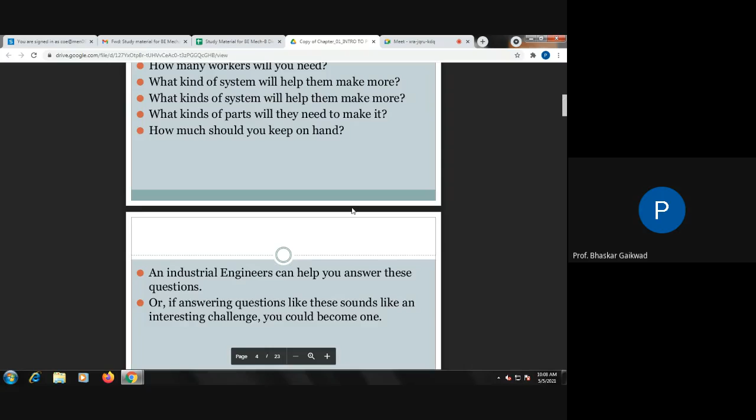Congratulations, here's a new idea that has been given preference to develop this product in industrial engineering. Second, how are you going to make that product? How many workers do you need? What is the requirement to start that industry? What kind of production systems will be there, and what kind of systems will help make it more efficient and effective? What kinds of parts will they need, and how should you keep them on hand? This is the second step. Industrial engineering can help answer these questions. If answering questions like this sounds like an interesting challenge, you should become one of this.

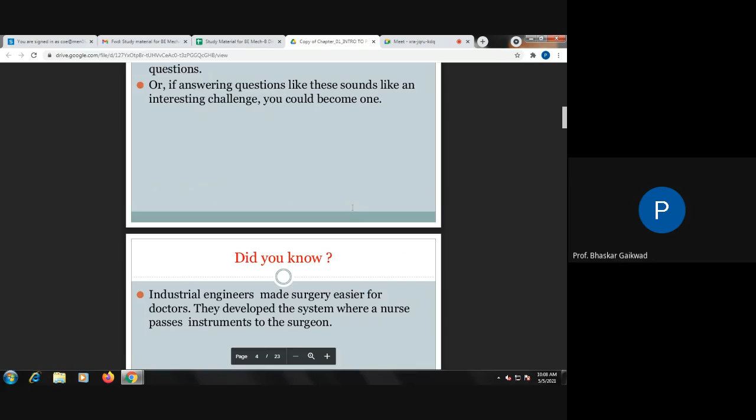Do you know industrial engineering made surgery easier for doctors? They developed a system where nurses pass instruments to surgeons. So this is the field of medical. We can also make use of the concept of industrial engineering here.

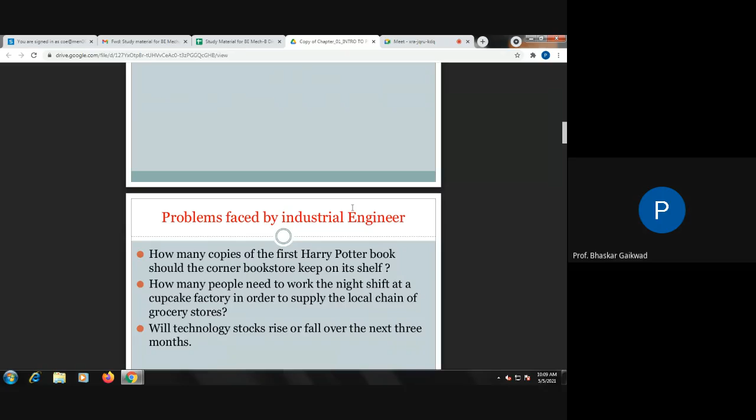Problems faced by industrial engineering: how many copies of the first Harry Potter book should a corner bookstore keep on its shelf? How many people need to work the night shift at a cupcake factory in order to supply the local chain of groceries? Will the technology stock rise or fall over the next 3 months? These are the problems faced by industrial engineering.

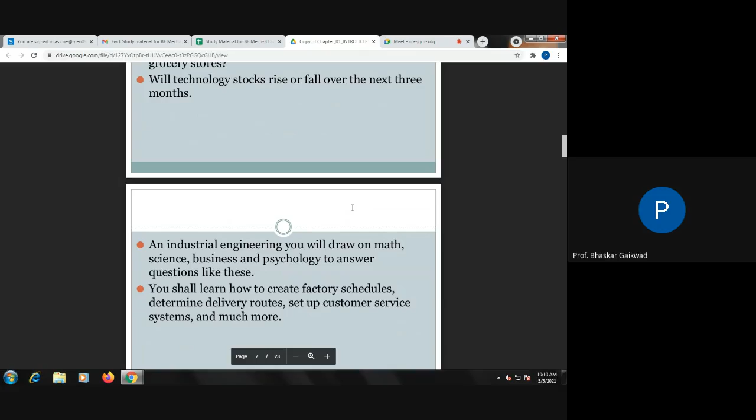Now, next is industrial engineering. You will draw on math, science, business, and psychology to answer questions like this. You shall learn how to create factory schedules, determine delivery routes, set up customer service systems, and much more. Everything's about the industry: the problem faced, setups, system required, manpower required, different types of equipment and machinery required. It comes under this, and it is not only applicable to industry, but in medical or any other fields, we can make use of this.

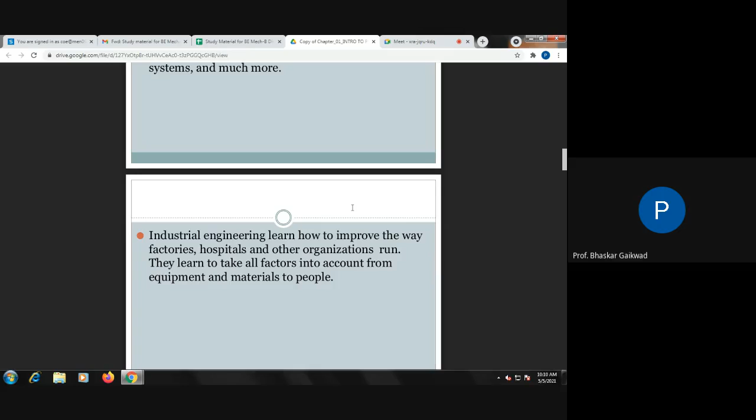Industrial engineering learns how to improve the way factories, improving the present situation in hospitals or other organizations. They learn to take all factors into account, from equipment and material to people. In short, industrial engineering will help improve present situations, reduce related costs, and improve the efficiency of production.

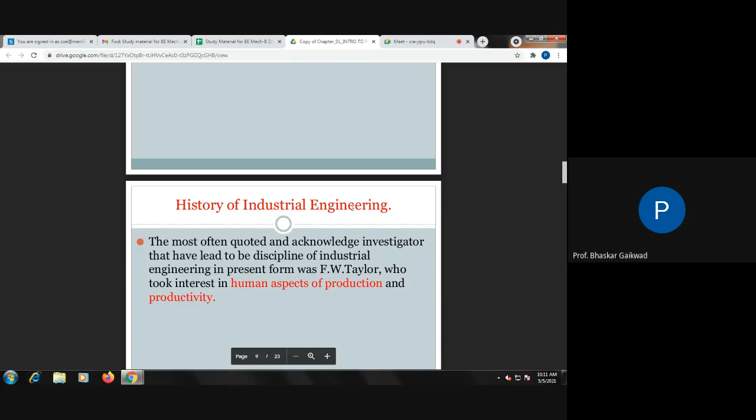How to increase production and productivity and reduce downtime - a thorough study was made by F.W. Taylor.

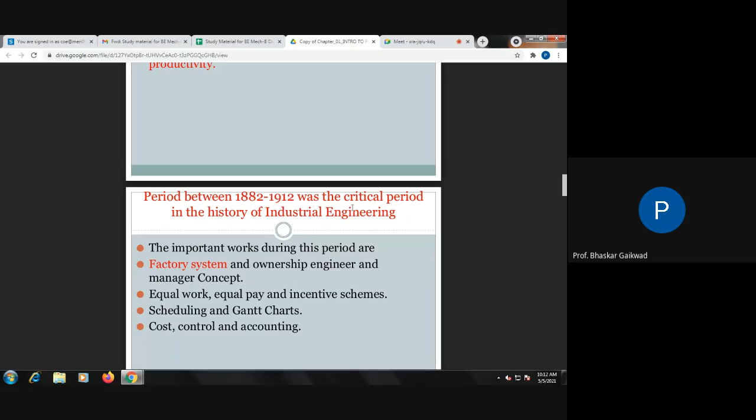From 1882 to 1912, the modern industrial engineering techniques had their origins. Then from 1942 to 1946, the actual industrial engineering concept started. First is predetermined time standards, PMTS - as we've gone through in the fourth chapter, predetermined motion time standards.

Value analysis and system analysis are some of the prominent works during this period. Before doing any tasks, we have to decide the time required. Value analysis reduces cost while keeping the function as it is. System analysis means how we can set up the system for converting raw material into a finished product.

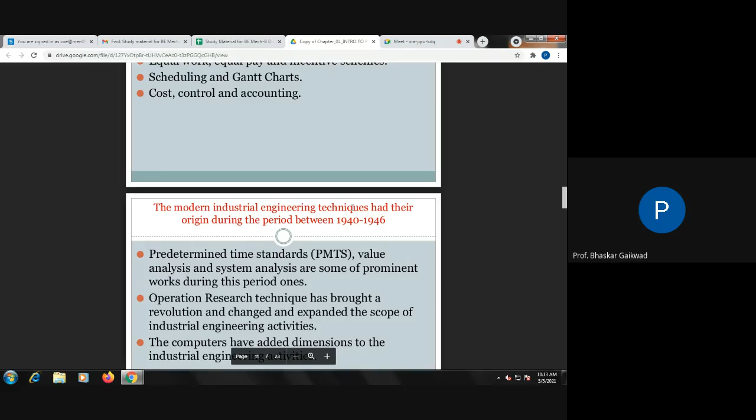Next is the operation research technique, which brought revolution and expanded the scope of industry. Some concepts of operation research play important roles in industrial engineering, like linear programming, assignment models, transportation models, critical path methods, PERT, CPM, and so many parts. These come under operation research technique, which has brought revolution and expanded the scope of industrial engineering - linear programming, transportation, assignment, and CPM parts all play important roles in industrial engineering.

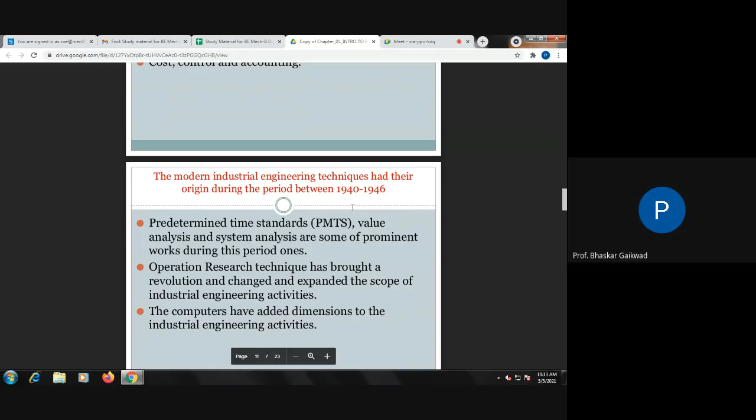Computers have added dimensions to industrial engineering. Nowadays computer activity plays an important role in industrial engineering in performing its activities.

Present status of industrial engineering: some of the tools or parts of industrial engineering cover four or five parts. That is value engineering, where value means reduce the cost and increase or keep the function. Then operation research, which deals with optimum solutions and optimizations under operations.

Then CPM, critical path method, and program evaluation review technique, which decide the duration of the project. Human engineering, ergonomics, system analysis, production planning and control, advanced information technology and computer packages, and mathematical and statistical tools like work sampling - these parts come under industrial engineering.

So briefly, industrial engineering includes value engineering, operation research, CPM, ergonomics, work measurement, and mathematical and statistical tools. The American Institute of Industrial Engineers brings together effective utilization of various resources and efficient production operations.

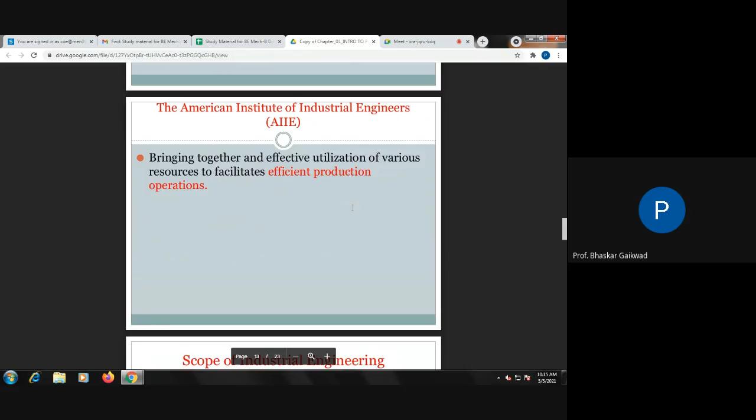In the first condition, whatever existing design is there, we can make improvements. Next is design and improvement of workplace methods and procedures - workplace meaning the assembly station, where present methods can be changed. Then design and improvement of product and service, where present products and their service can be changed.

Design and improvement of organization - this is where we can make use of industrial engineering.

Whenever present methods exist, maybe in manufacturing or ongoing methods in medical fields also, you have to survey and make improvements over the present method, decide the procedures to change these present methods, and determine what the output will be. This comes under industrial engineering.

In short, remember industrial engineering is related to improvements in present methods and logically setting new methods without affecting the value or function of that product. Ultimately, it leads to increased production and productivity.

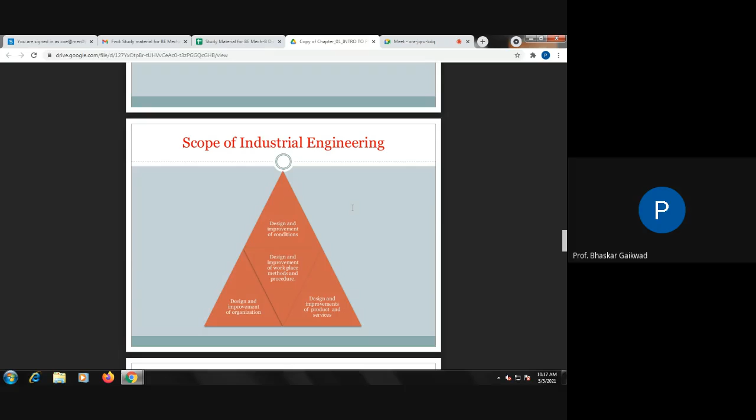For design and improvement of conditions, there are external and internal factors. External factors include vendor development, customer research and need analysis - this is away from the factory.

Internal factors include ergonomics, light, noise, and ventilation. To increase working efficiency in any industry, we need to look at these internal factors. Ergonomics means easy operation of equipment and machinery - it is also called the work law, and these words came from the Greek language.

In working conditions, sufficient light should be there so there's no trouble to the workers' eyes. Noise and vibrations should not be there, otherwise they will affect workers with headaches. If overloaded work is given to a worker, definitely fatigue will occur, or if more than expected work is given, fatigue will result. Good ventilation is needed to increase work efficiency.

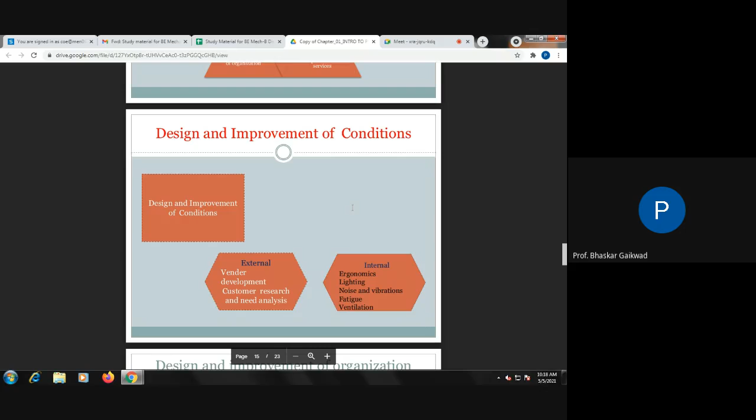So while doing any improvement, internal and external points need to be remembered. Then, design and improvement of the organization - three points you have to remember.

First is operation research, meaning what actually optimizes the process - process optimization to reduce cost. Organization issues may include the policy of the organization, material handling systems, and community facilities - this comes under organization issues.

And decision theory - deciding which is right and which is not right: the right person at the right place, manufacturing the product at the right time, and delivering at the right date. This decision-making comes under the organization.

Next is design and improvement of workplace methods and procedures, where you are doing the assembly, etc. Here some words play an important role - work study means studying the work to minimize downtimes and decide the standard times for it.

System analysis covers the ongoing system and production planning and control - you have to analyze what is not useful and reduce it. Layout planning, whether product or process layout, fixes which type of layout is used. Planning for all things includes material requirement planning, manpower planning, and production planning and control - these words will all be there.

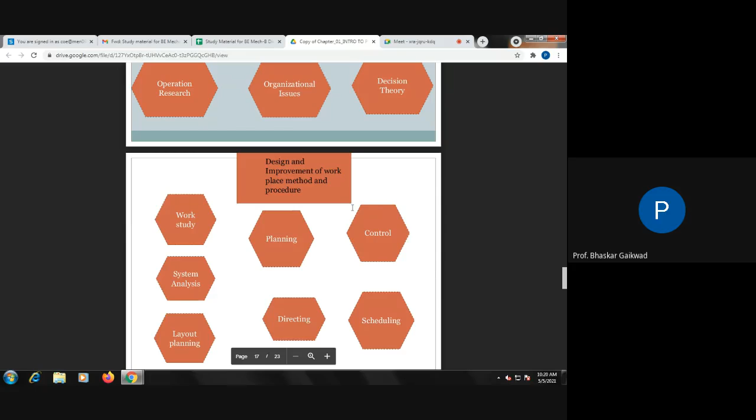Directing and scheduling. So here's what is actually output. These are the things you will get from the directing and scheduling process.

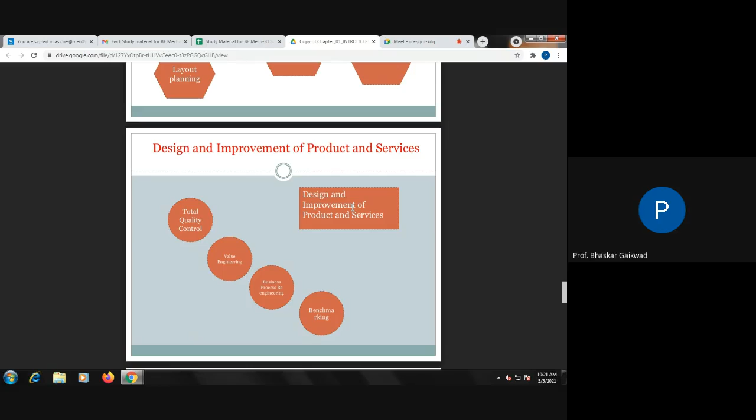Then design and improvement of product and service. Here we have total quality control, value engineering, business process re-engineering, and benchmarking. Ultimately, total quality control is the best thing in the design and improvement of product and service. Total quality control means quality control for everything — organization quality, manufacturing quality, delivery quality, and the expectations of that product. Each and everything, the quality aspects will be there. This is total quality control.

Now, the role of industrial engineering uses operation research and quality techniques, develops them, and uses computers and IT tools to make use of industrial engineering.

Now, application of industrial engineering — the major activities under industrial engineering include decision making, designing production systems, and dealing with new product technology.

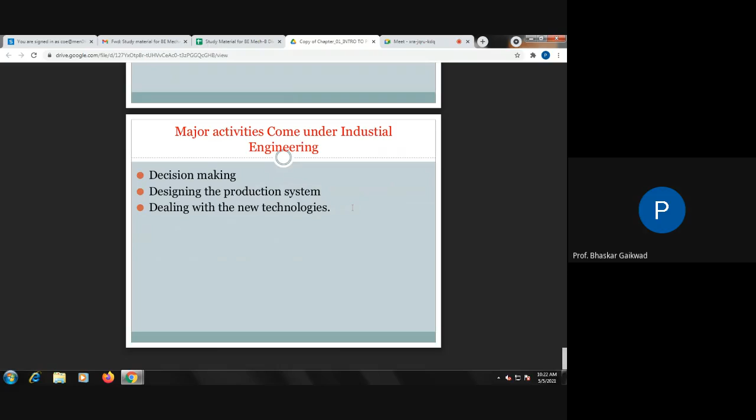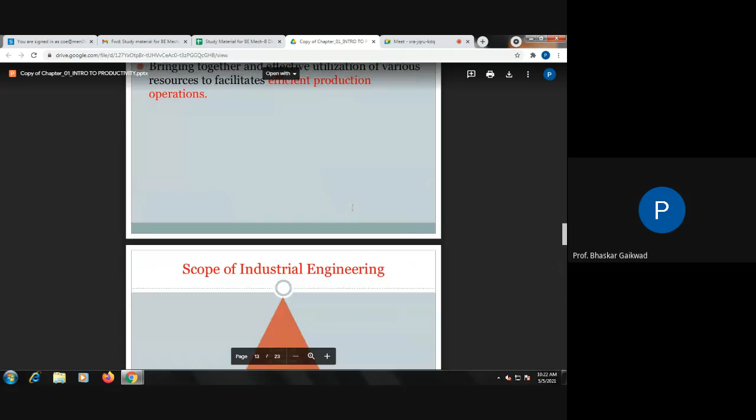So this is about the introduction related to industrial engineering. So let us go through this present industrial engineering.

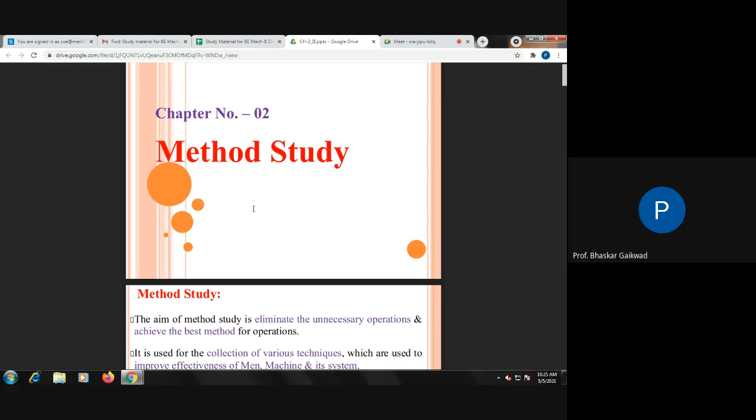Now related to chapter two, method study. The aim of method study is to eliminate unnecessary operations and achieve the best method of operation. For example, suppose forging is there. In the present method you can study, there may be more material wastage and more time required.

So you have to analyze how we can reduce that material wastage and how we can reduce that time. It is used as a collection of various techniques to improve the effectiveness of man, machine, and material — meaning effective utilization of man, machines, and materials. So it is also called work design or method engineering.

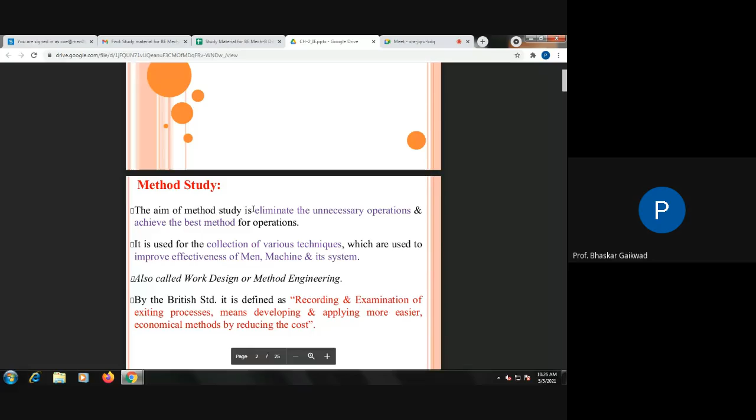The next name given to this is method engineering. By British standard, it is defined as the recording and examination of an existing process — meaning recording the present process, understanding it, developing it, applying it, and finding how it can be done economically for the same product. Ultimately, this means how we are going to reduce the cost.

So next is the objective of method study. Elimination of excess work content means unnecessary time or unnecessary work — if we are doing that, we have to remove it. Analyzing the data of the ongoing operation means we can split the given data of the operation.

For example, turning, milling, or any shaping operations are there. We can analyze how much time is required, how much wastage is there, and what is the quality. You have to analyze and develop a better method of doing the operation — new methods. Whatever the weaknesses or problems in the present method, we have to remove them and develop a new method. This is the objective of method study.

Reduce the monotony of the work. Monotony means if we are doing the same work again and again — for example, every day going for drilling, same drill, same holes. If we are doing this again and again every day, our mind will not work properly. So these problems we can avoid. Every day there should be a change so that our mind will work and monotony will not develop.

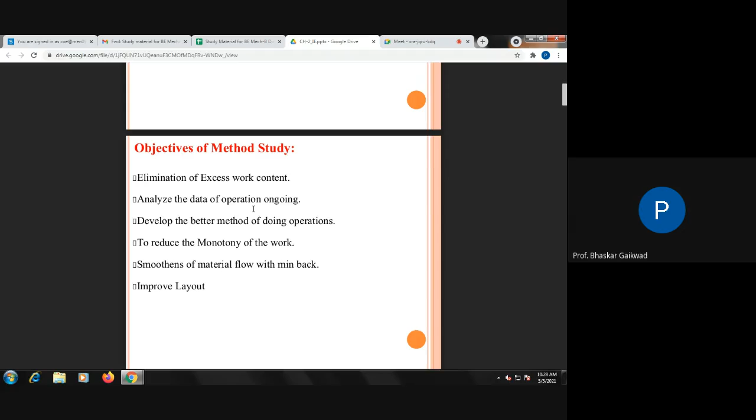Smoothness of material flow with minimum backtracking — smooth flow of material is always expected in the production process or step layout. Improvement in layout: suppose the present method is the process layout, is it possible to make it a line layout or product layout? So these things you have to study and make improvements to the present method. In short: study the present method, develop new methods, and get the output of the new method.

Then the scope of the method study. Here's where we can make use of this method study.

All types of service sector like office, bank, hospital, and all types of manufacturing organization. First, the manufacturing operation. Whenever manufacturing is going on, there we can use the method study.

Work method and process is there. There we can use workman material movement with backtracking. There we can use effective utilization of tools and gauges, material handling system, improve labor efficiency, reduce monotony, reduce cost. So cost, efficiency, production, productivity, effective use of materials - whenever these things are there, we can use these methods.

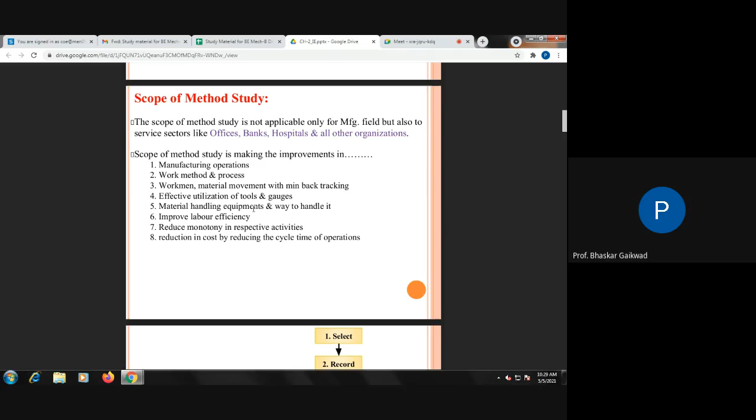Then work study procedure is there. So how you can do the work study here? First, you can select the job or the area, recording the present methods.

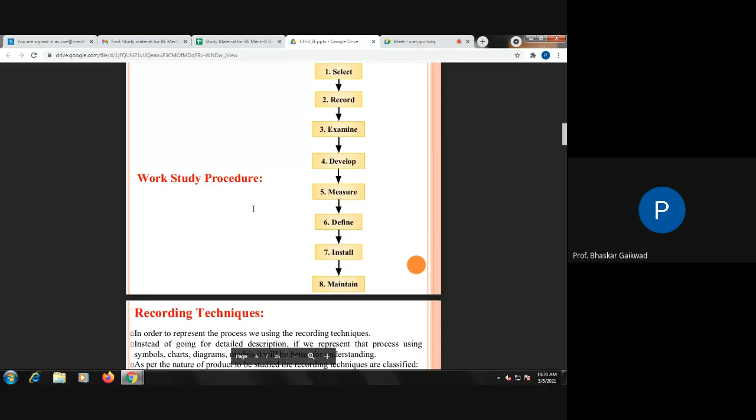By critical examinations, you can ask the different questions. Then develop the new methods, measure the output of the same methods, define the clear title of the new method, install that method and continue that method, that is maintain. So this is the work study procedure.

8 points are there. So recording techniques - in order to represent the process, recording techniques, so many techniques are there. Under this, some charts are there and diagrams are there.

So here's five types of charts. First chart is the operation process chart or outline process chart, also known as bird's eye view. Second, flow process charts - man, material, machine types are there. Three types of charts are there, flow process.

Two-handed process charts by using left and right hand, assembly of the carburetors, assembly of the watches, etc. Multiple activity charts, one man handling more than one machine.

Then here are two types of diagrams. We can use the flow diagram and string diagram. Whenever repetitive work is there, string diagram is there, and when repetitive work is not there, flow diagrams will be there.

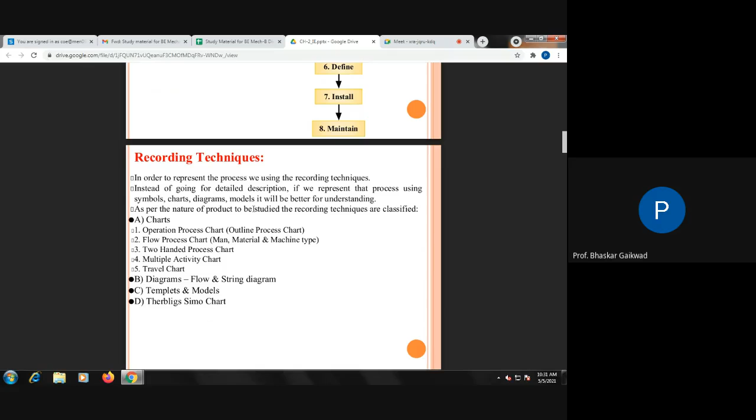Therbligs and Simo chart - simultaneous motions chart by using micro motions captured by the video, then pictures. With help of this, we can develop the simultaneous motion charts by using the two-handed process.

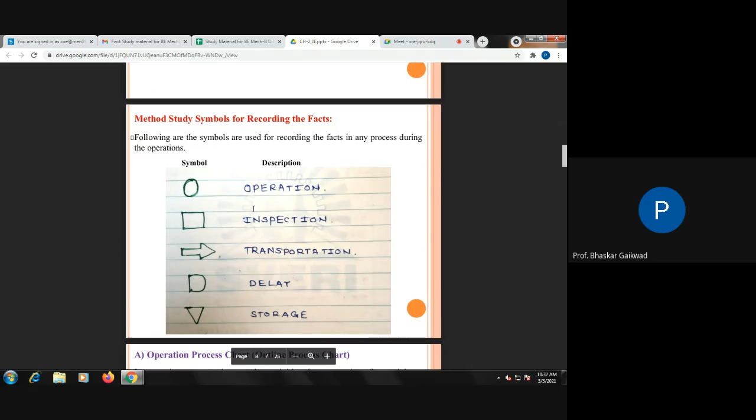So here some symbols have been used in the operations or the flow process charts. A round symbol is there for operation, square symbol for inspection, arrow for transportation, D for delay, and triangle for storage. Only these five symbols you have to remember.

Then the little bit concept of this operation process chart and outline process chart.

In operation process chart, major activity entry point of materials are recorded. Means here two activities you have to record - one is operation and then inspection.

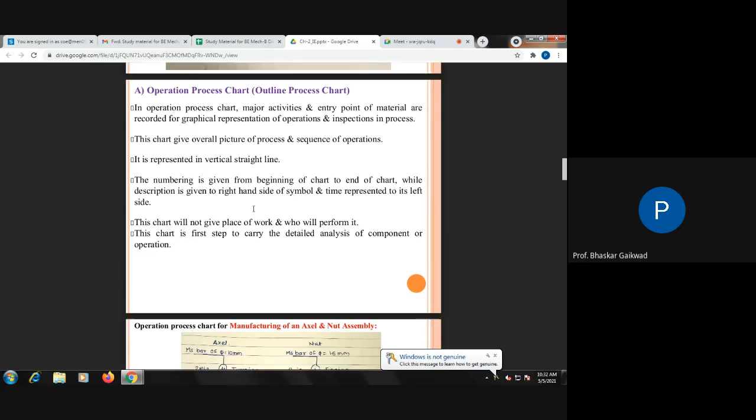So one more example here, the example of the nut and bolt assembly. You can make yourself the example of the same by using only these two activity symbols - operations and inspection.

So here, bar of the nut, the one operation is there. You can write from the cutting of the bars to the assembly of the bars by using only two symbols, operation and inspection symbol. Not only this example, you can take other examples.

Manufacturing of the washers, manufacturing of crankshaft, manufacturing of the bearing, manufacture of your workshop job - cutting operation, after the turning operation, after the drilling operation. Each operation there is a need of inspection.

So alternate turning and inspection times you have to note down. So you can calculate the total operation times and total inspection times, and over this you can think how we can reduce the times.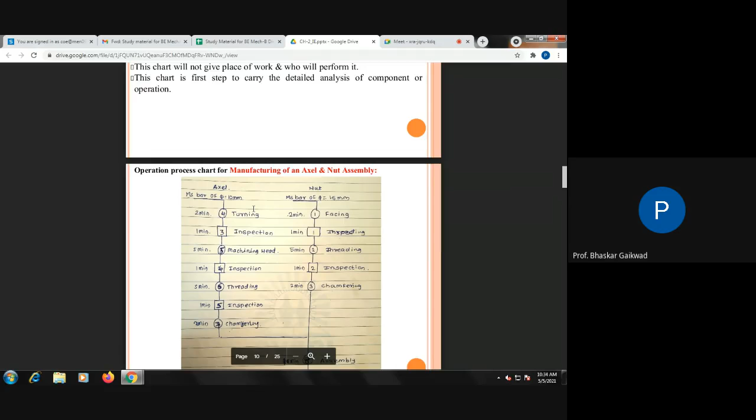Now next is the travel chart, a tabular method which records the quantitative data - means frequency of transportation, distance traveled by materials or operators. In the chart, all departments are listed column-wise with same sequence, and each intersection box represents data movement from one location to another.

So here is the from-to with the volumes. These examples I have taken in your lecture. So how much the times from B to C, B to D, and B to E. So the frequency - see that B to D, double X is there. So here to-from is more, and how much time is there.

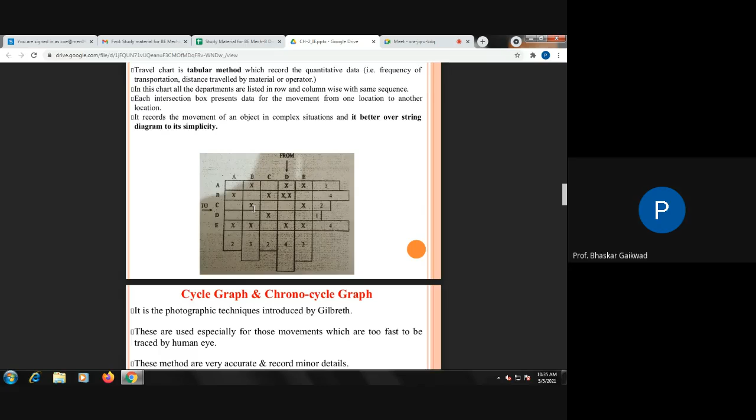So here if you see vertically, more concentration need to be given. Instead of from to E4 there, and B4 is there, so greater values there is a need to concentrate - there is a problem needing improvement over this.

Now cycle graph and chrono-cycle graphs - here we require video, this is not in our syllabus.

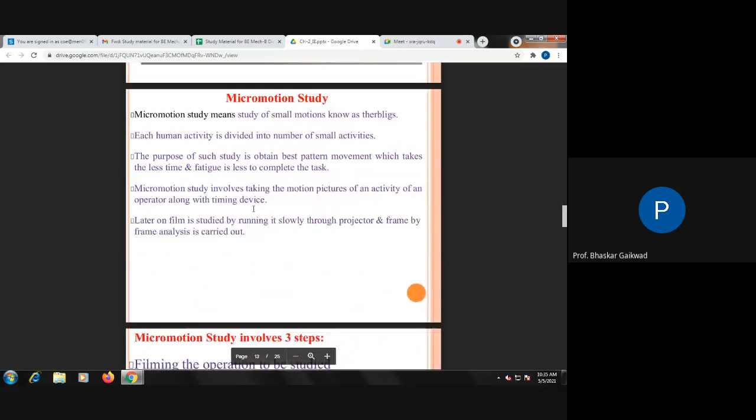Micromotion study means studying small motions known as therbligs. There are 18 therbligs that you have to study. Each human activity is divided into a number of small activities like grasp, reach, and so on. The purpose of such study is to obtain the best pattern of movement which takes less time and causes less fatigue to complete the task.

So every motion should have a particular predetermined time. With the help of this, we can reduce the total time as well as the fatigue while doing the work. Micromotion study involves taking a motion picture of the activity along with timing devices.

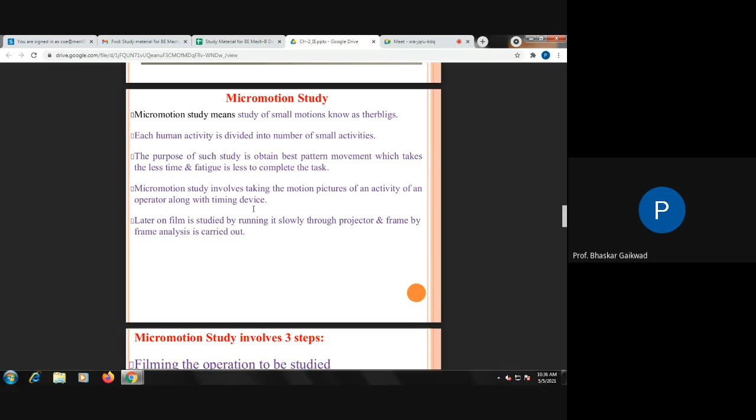Using video or camera, you can study the present methods, and by slow motion analyze each activity to decide the time. The micromotion study involves three steps: filming the operations to be studied, analysis of the data, and making a record of the data.

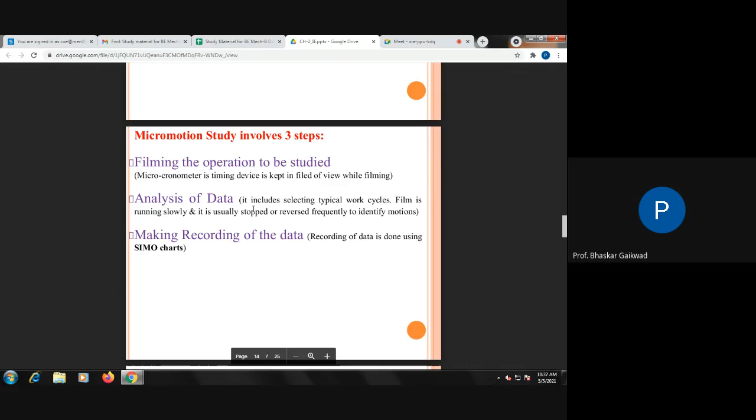It's a simple process: whatever the present operation is going on, you picturize it, then view it in slow motion of the camera, decide the different activities and the time required for each activity, and think over whether it is possible to reduce the time. Accordingly you can find the result. This is the micromotion study.

Now the next topic is the SIMO chart, the Simultaneous Motion Cycle Chart. SI stands for simultaneous, and MO is motion. It is a recording technique for micromotion study.

It is related to left and right hand charts, the two-hand process chart. As you may have already observed, in our method study there is also a two-hand process chart, and in the SIMO chart there is also a two-hand process chart.

It shows on a common time scale the simultaneous movement performed by the two-hand process. It is expected to do equal work for both hands, but something may go wrong in the motion of our hand. An attempt at improvement is made after studying these SIMO charts.

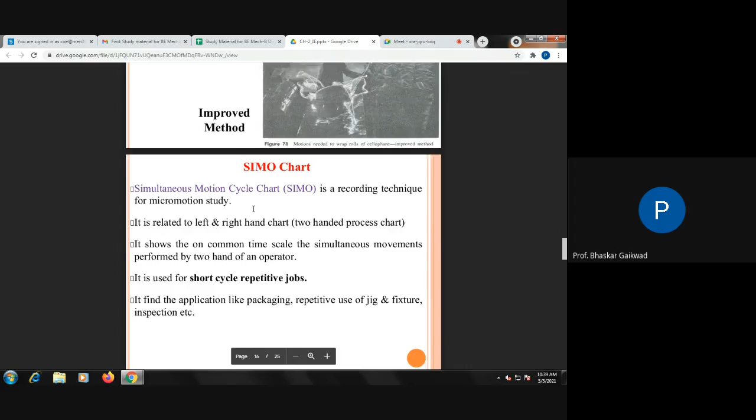Some applications of the SIMO chart are given here. Here is an example of a SIMO chart showing left hand side and right hand side, with symbol, time, symbol, and total time given.

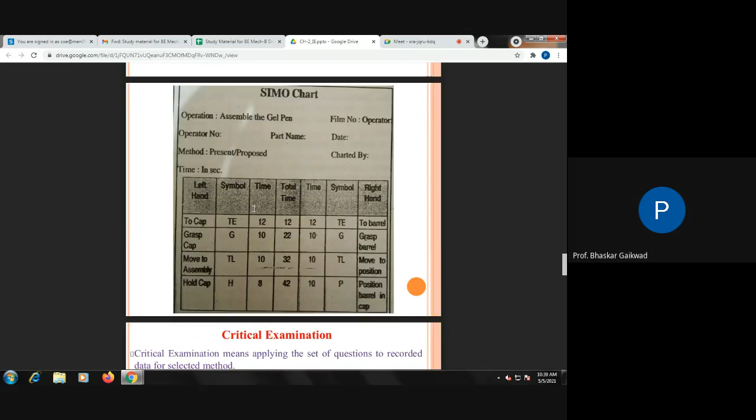Next is critical examination. While going for work study, some critical examinations are required. There is a need to ask certain questions: why, when, where, and so on, using the 5W and 1H method. Critical examination is achieved by means of two types of questions: primary and secondary questions.

In critical examination, we need to ask two types of questions: primary questions and secondary questions. In the primary questions, there are five aspects: purpose, place, sequence, person, and means.

Purpose covers question number one and two: what is done, and why is it done. For example, if we want to develop any part of a machine, you ask what is done and why it is done, because this is the requirement.

Then place: where can we do this, why is it done in that plant, whether in our workshop or any production shop or any other shop, and why we can do it in that particular place. You search out the answer to the same.

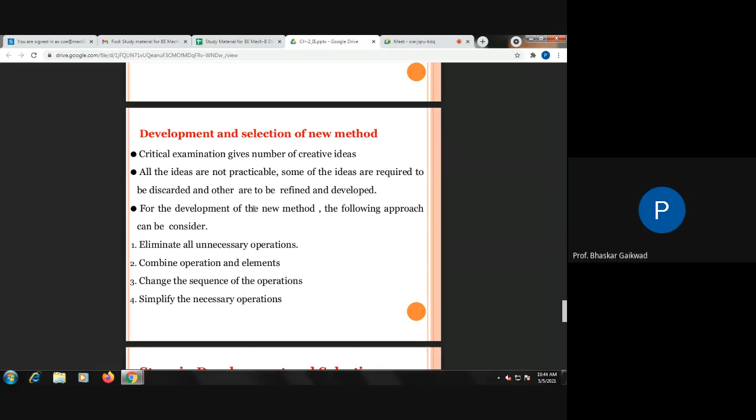Combine the operation and element - here turning and facing operations we can combine. Change the sequence of operation - suppose any job has threading. Before threading we require turning; we cannot directly go for threading, or if we do threading before turning, the shape of the threads will be affected. Simplify the necessary operation, which is simple, not critical. Accordingly, you can think about it.

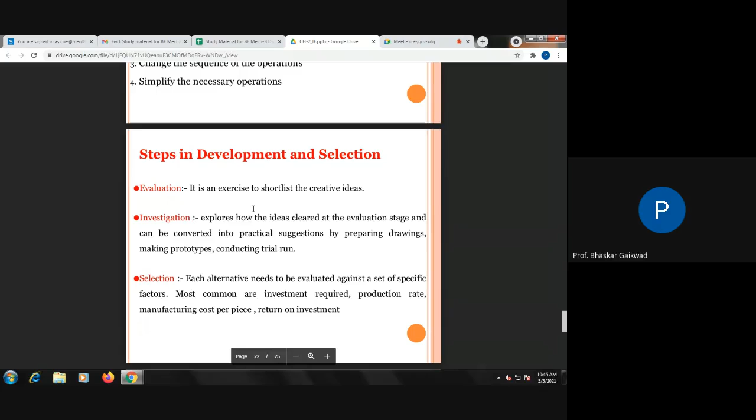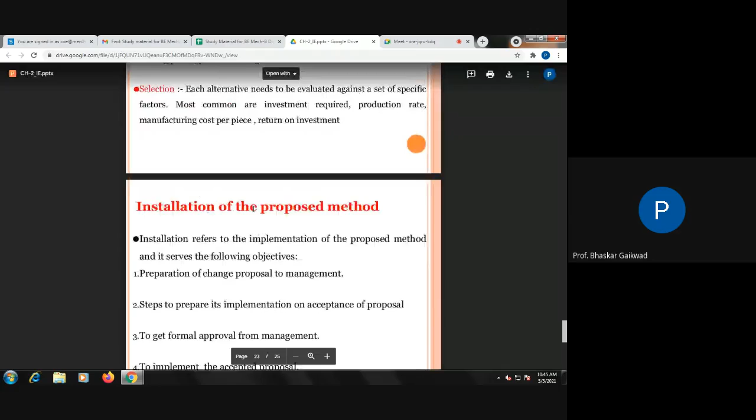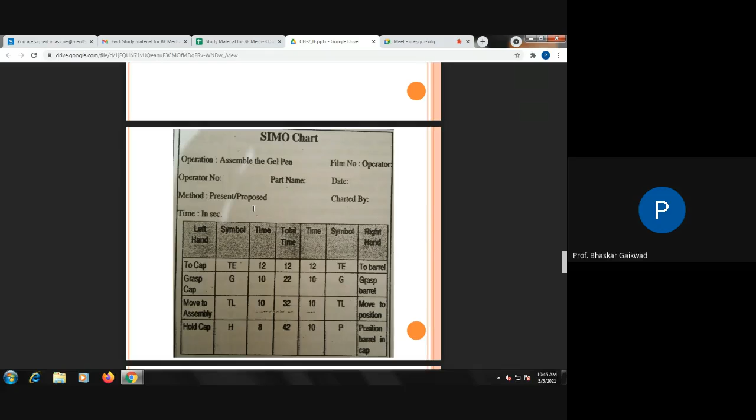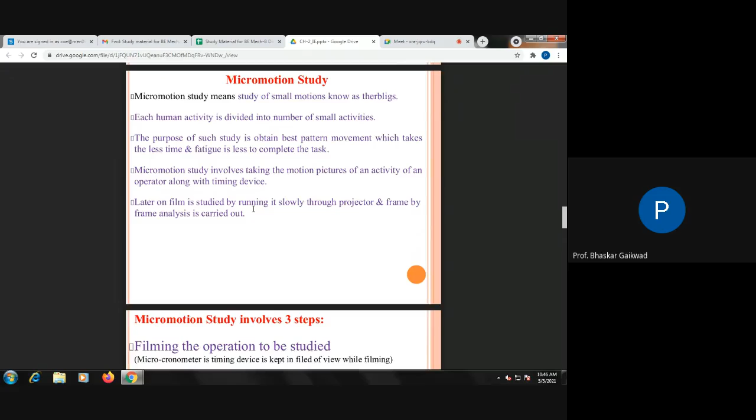Short and sweet summary of chapter number 1 and 2. So which points do you have to remember in the summary related to production and productivity? First, what is actually the scope of industrial engineering? Then importance of industrial engineering, contribution of F.W. Taylor and F. Gilbreth, difference between production and productivity, and work study - the selection of different steps in work study.

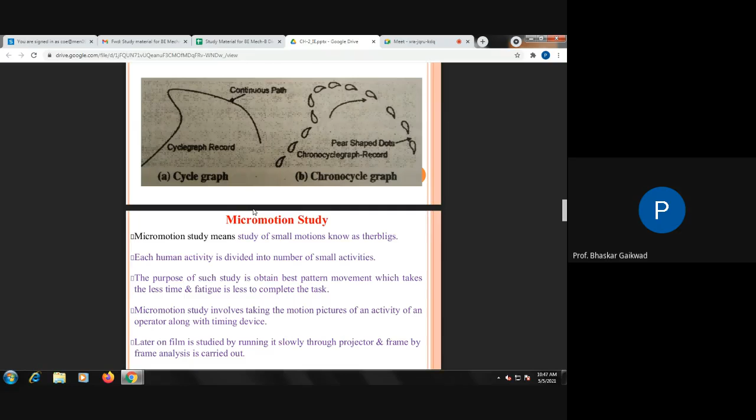So these are the summary related to chapter number 1 and 2. In short, I will repeat which points we actually require in industrial engineering introduction and method study. First, what is actually the definition of industrial engineering? What is the scope of industrial engineering? What are the objectives of industrial engineering? Then, basic difference between production and productivity, factors affecting productivity which we're going to study, and after that, work study - what is the concept of work study? What is the procedure of work study? These points you need to cover in chapter number one.

In chapter number two, what is actually the definition of method study, the objective of method study, scope of method study, basic procedure - 8 steps you have to remember. Then five symbols and related charts like operation chart, flow process chart, multiple activity chart, two-handed process chart, and two diagrams - string diagrams and flow diagrams.

Travel chart is there, then template and model examples I have given from the sugar industry. Micro motion study and different types of Therbligs. SIMO chart is there, and after that develop and selection of the new methods and make use of the implementation of the methods and find out the result.